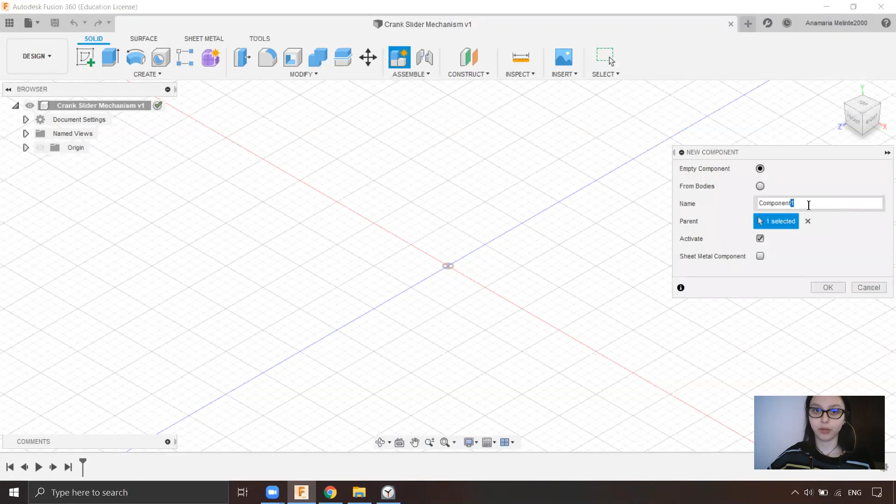For this example, we do it the right way, applying Fusion rule number 1. So we will create components first, and then we'll create the bodies. So I will start by doing the crank and the slider in this video. I will create a new component, which will be called crank. Almost, almost perfect. Crank. Okay, and inside of it, I will create the sketch on the bottom plane.

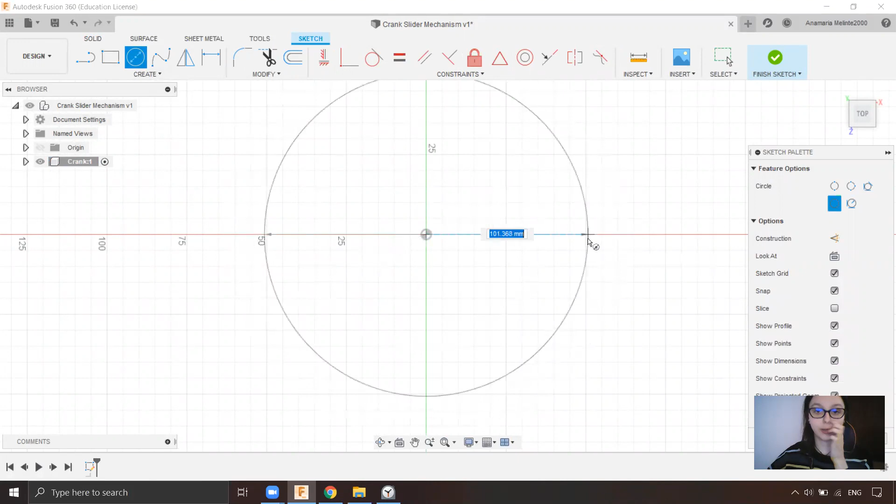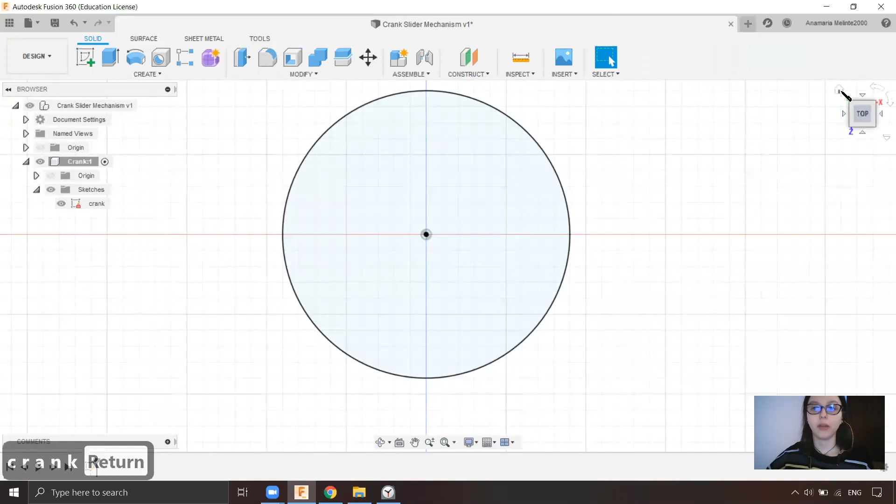And I will start with a crank of the size 90 millimeters diameter. I will click OK. So I am activating this component when I'm working on it. And as you can see, the sketch is inside of it. And I want to rename this sketch crank. Good. Now I am ready to extrude it. And I will extrude it like 4 millimeters. And here will be the body. Crank. Wonderful. Now let's create the slider.

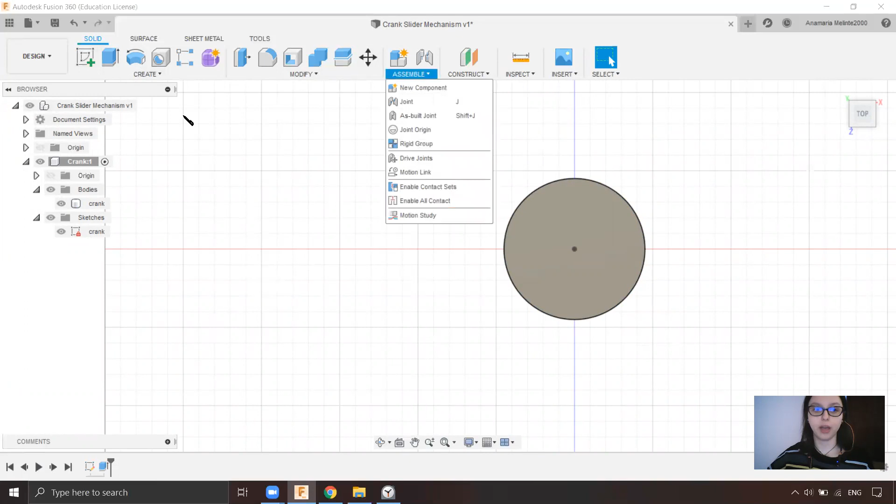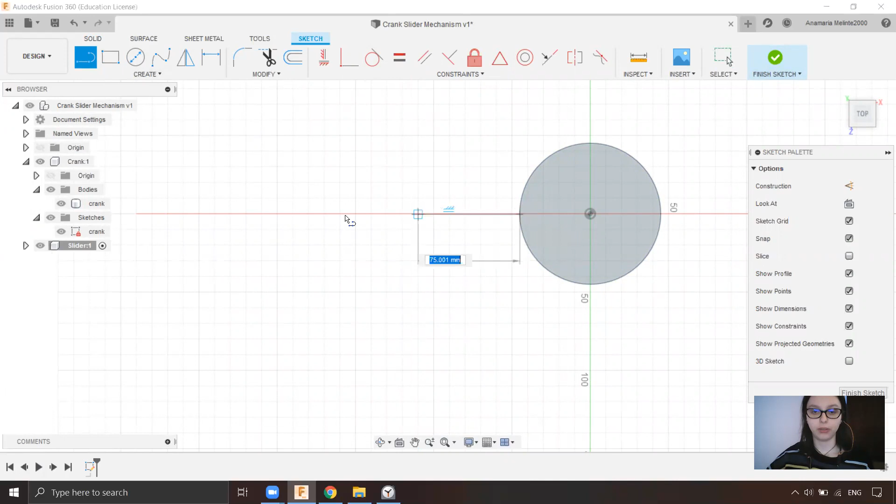Okay, so I want my slider to be somewhere like here. But first, I will create by activating the root component. I will activate it, and I will add a new component, will be the slider. I'll click OK. I have the slider activated, and now I can sketch. Again, on the bottom plane. And I want to have a distance of 80 millimeters between those two.

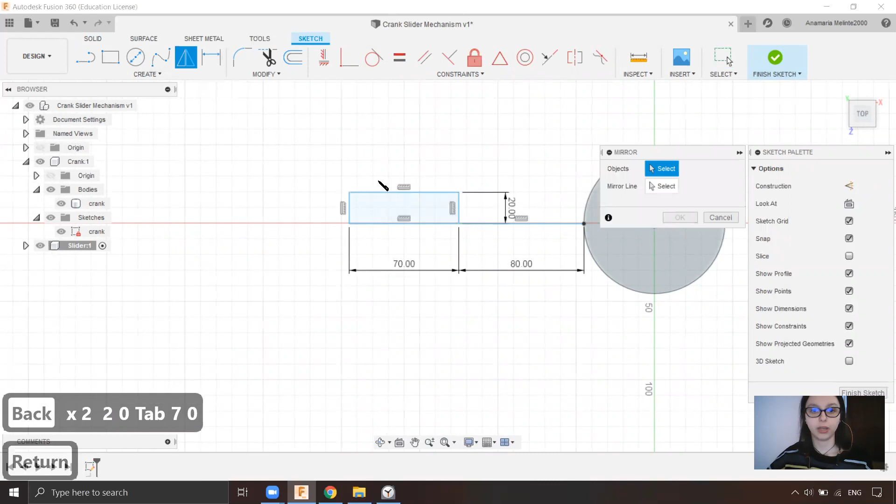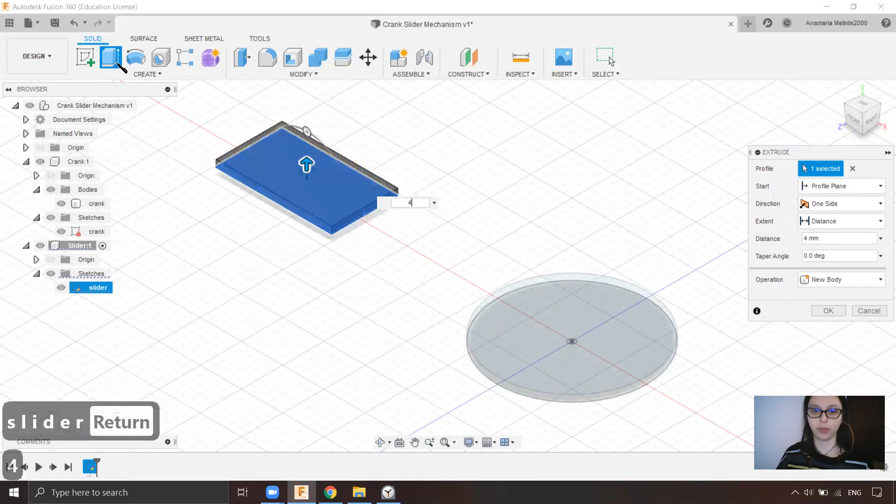And I want my slider to have 70 millimeters and 40 millimeters. But I will do again the mirror trick to have it centered. I will click OK. So this will be my slider. I will finish the sketch. And I go here and rename the sketch slider. And what can I do? I can extrude it as well 4 millimeters. Okay, so I have the slider and I have the crank.

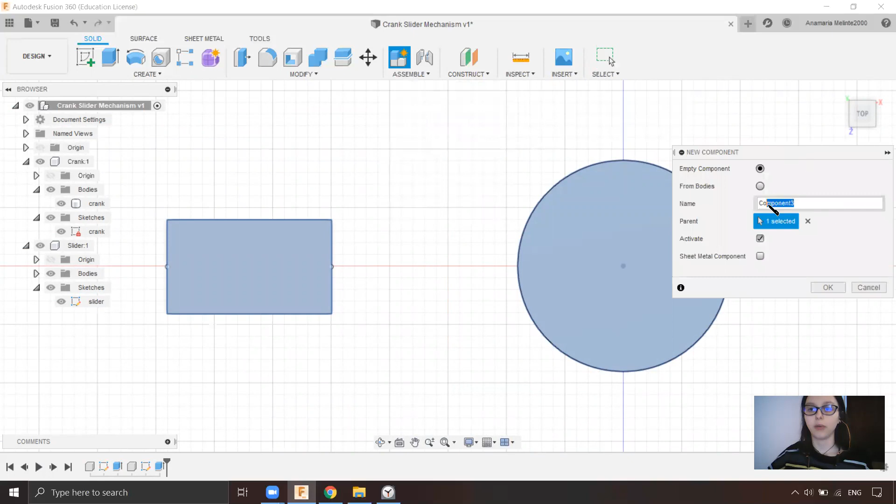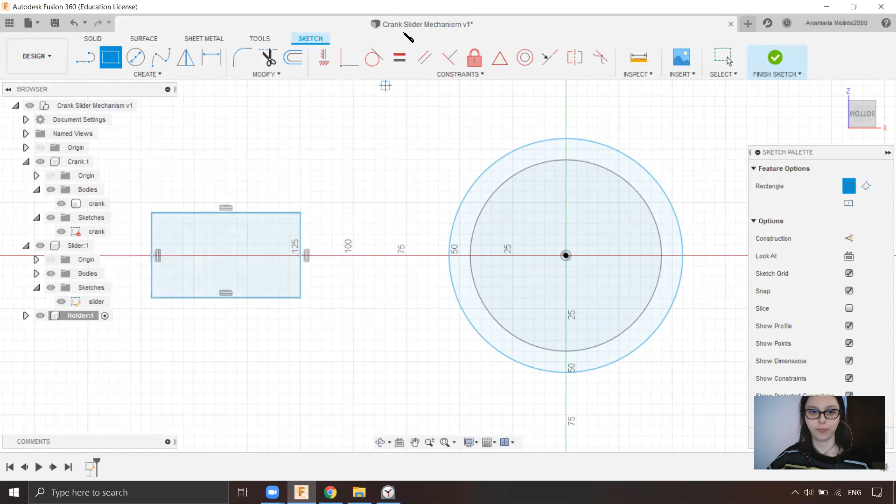Let's do a holder for them. So to do a holder, I will create a new component, but I need to be in the root component to do this new component. I will name it holder. Okay, and what I want to do is to go on the bottom and start to sketch on the bottom, and I will follow those parts. I want something like with 10 millimeters bigger. And what I'm gonna do is to do the same here, but with 10 millimeters again.

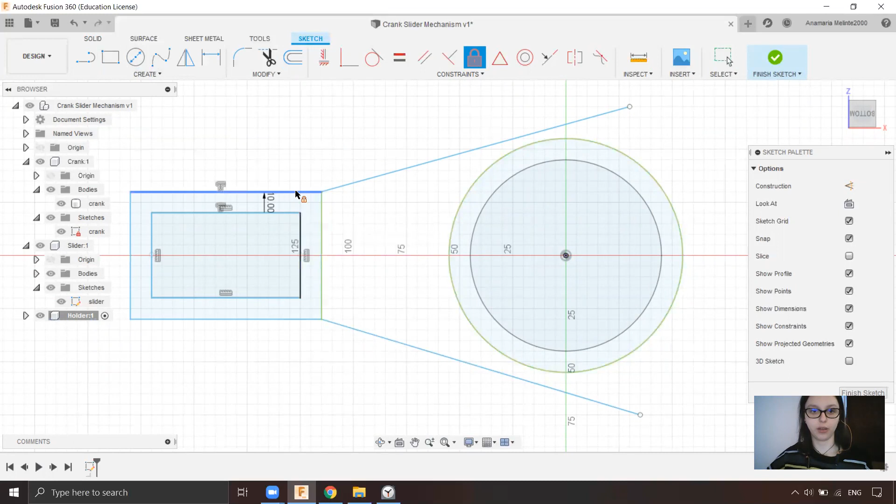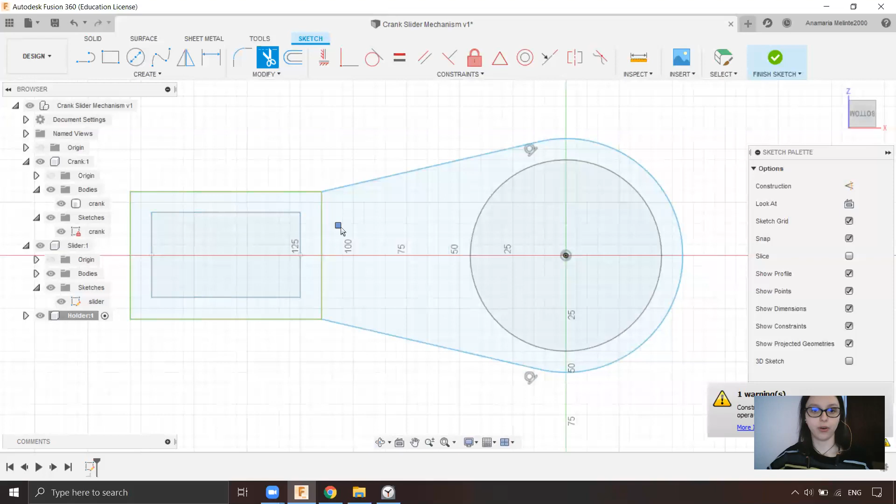Okay, and I want to connect them, and I will use 2 lines. I will be sure that those parts are fixed, and now I can apply a tangent constraint to make an entire shape. I will delete the other ones. Okay, and now I have all I need as a piece. I can click Finish Sketch, and now is the time for extrusion. I will go 4 millimeters as well, but on the other side, new body.

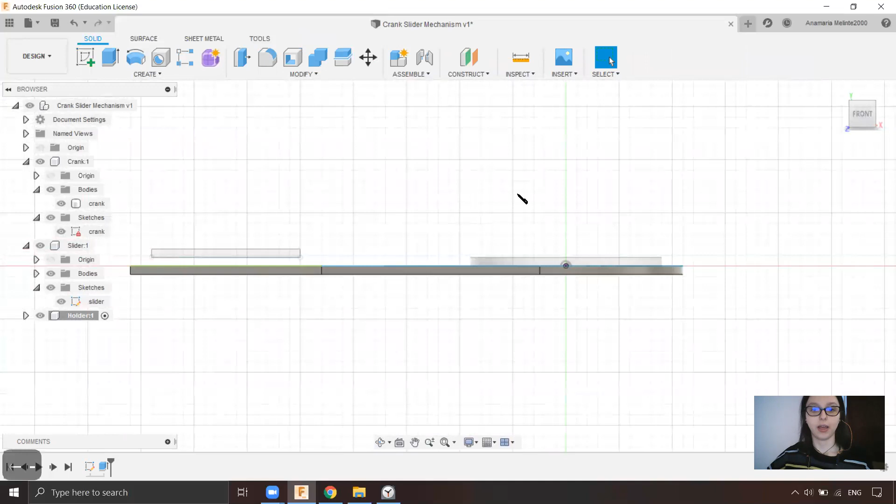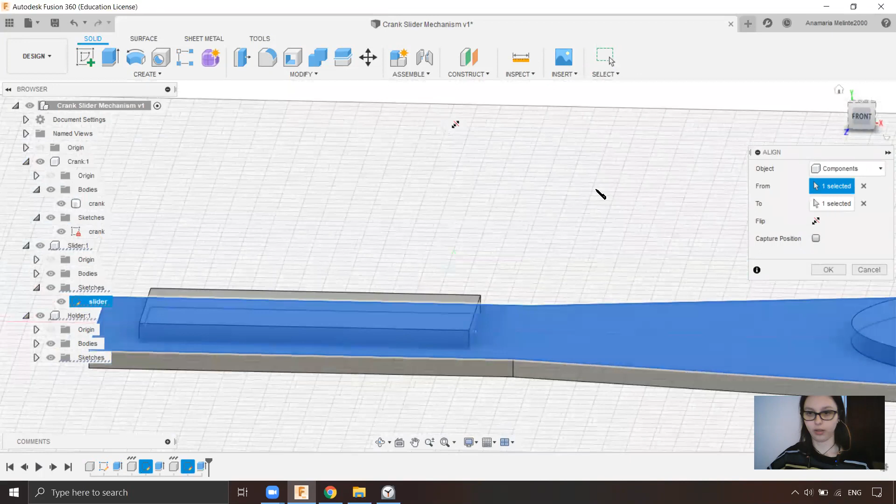And I can see that I have a problem. The slider should be lower. But to do this, I will go into the root and I can go to the align and I will select those two and they are aligned now. I will click OK. And here are my crank, slider, and the beginning of the holder.

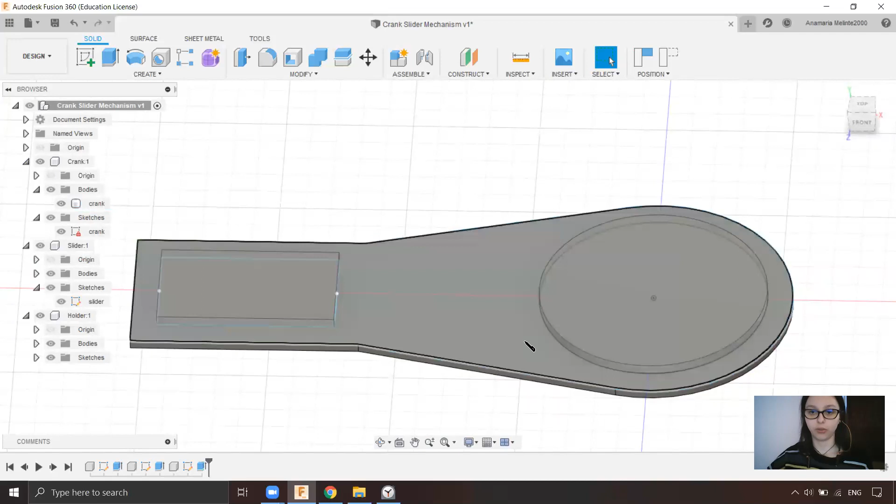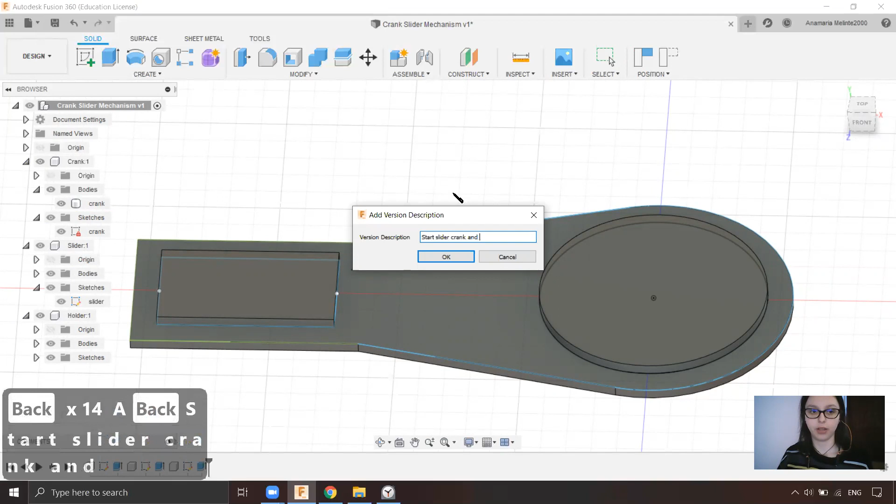Because in the next video, I need to create a hole in the crank so the holder can keep the crank. So the crank has something to move around, and to continue the holder for the slider so the slider can move in place and will not fall from the mechanism. But for now, we can save. I will save start, slider, crank, and holder. And we will continue with the mechanism into the next video.